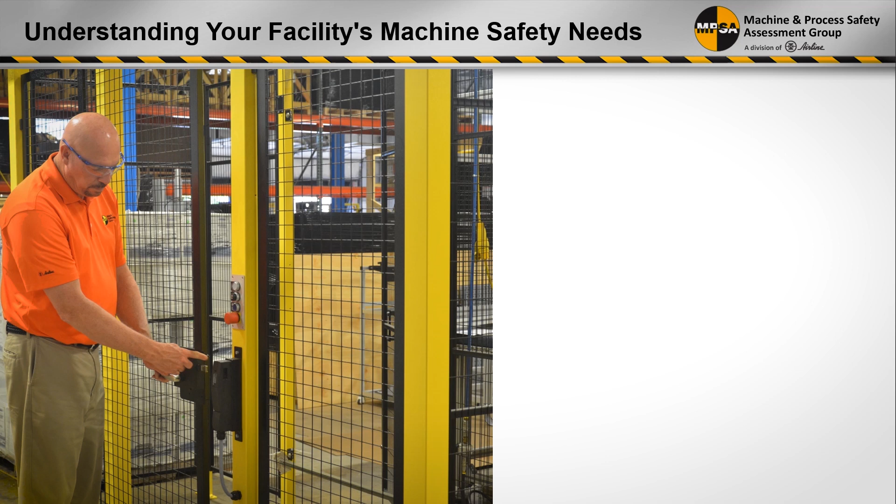Like all of the programs in our series, today's session will focus on machine safety topics that often begin as a question we encounter when working with our clients. Our goal is not to make you a machine safety expert, but to familiarize you with the technology, industry standards, and regulatory requirements that may apply. Most important is that you leave this session with an increased understanding of machine safety and know where you can find additional guidance when needed.

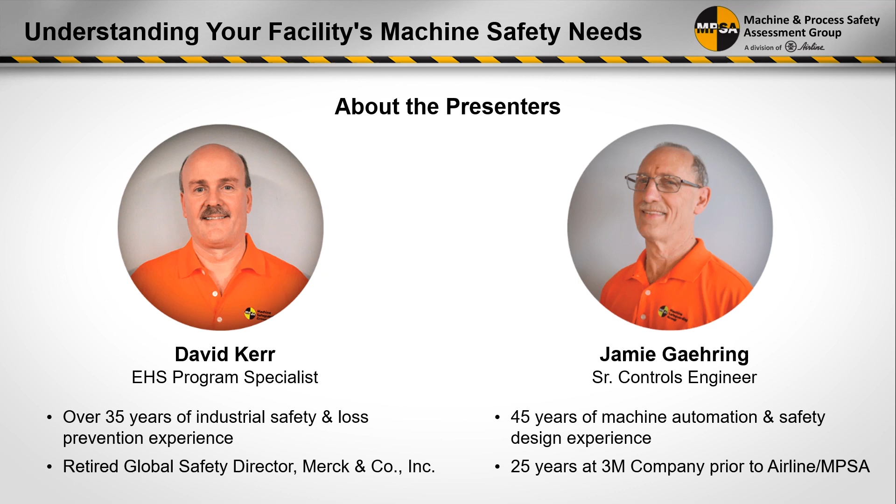David will begin today's session by discussing the challenges and complexity of machine safety.

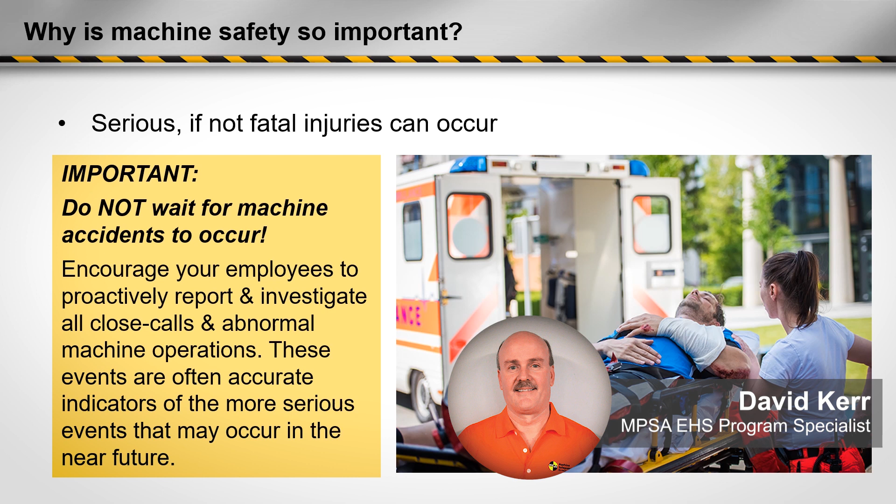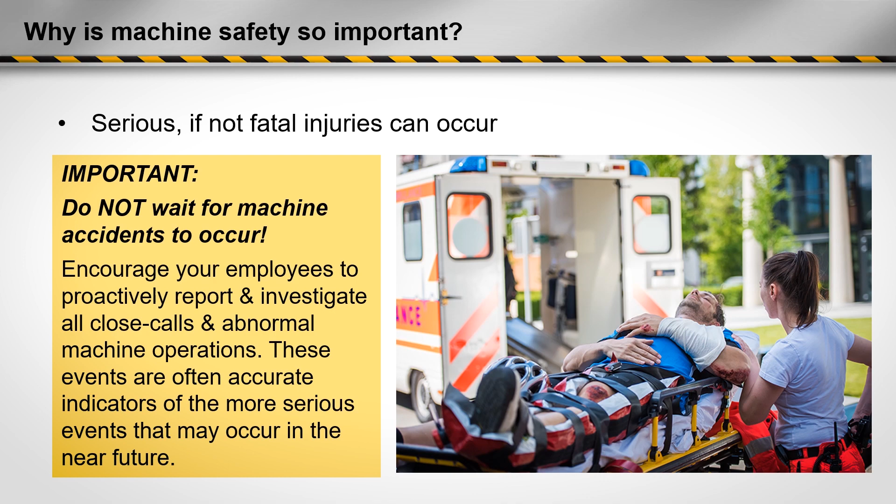Why is machine safety so important? First and foremost, machine safety incidents often result in serious, if not fatal injuries. These are not just soft tissue injuries, cuts, bruises, skin irritation. These are injuries that require emergency treatment, hospitalization, amputation, and unfortunately in some cases result in occupational fatalities. However, it is important not to wait for machine accidents to occur. Encourage your employees to proactively report and investigate all close calls and abnormal machine operations. These events are often accurate indicators of the more serious events that may occur in the near future.

Machine safety incidents can be very traumatic and have a lasting impact on employees, especially those who have firsthand witnessed such traumatic events. Machine safety incidents can also create doubt in the minds of employees who must continue to operate similar machinery.

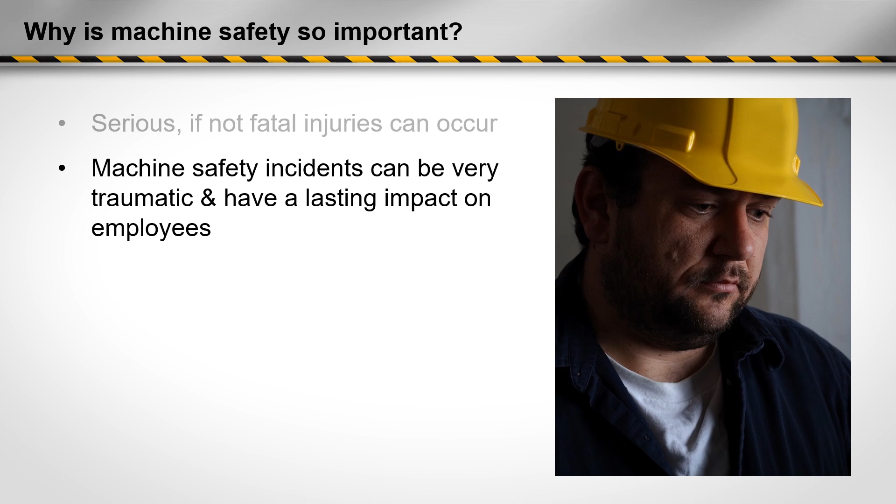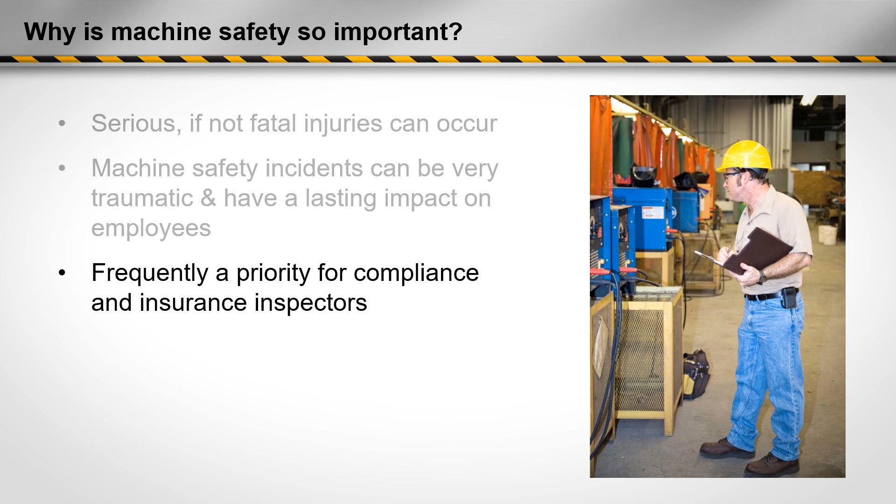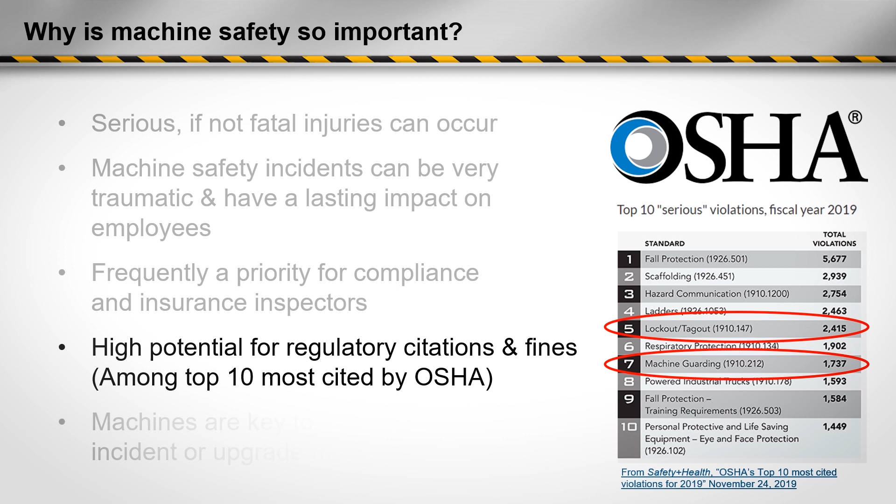Due to the seriousness of machine safety incidents, machine safety continues to be a priority for both compliance and insurance inspectors. Due to this increased emphasis, machine safety continues to have a high potential for regulatory citations and fines. As can be seen on the right-hand side of the slide, both machine guarding and lockout-tagout continue to be one of the top 10 most cited violations by OSHA. But we all know that machines are key to revenue generation, and any safety incident or upgrade may impact critical production needs.

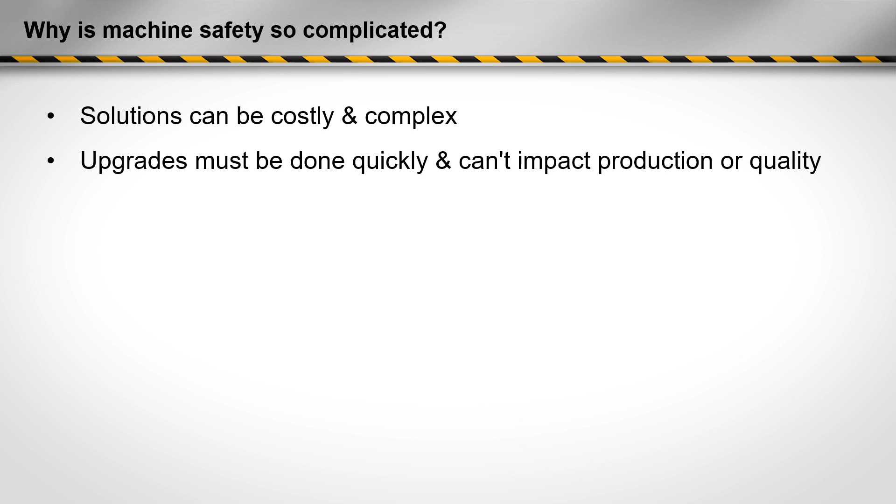Why is machine safety so complicated? Well, quite frankly, solutions can be costly and complex. Upgrades must be done quickly and often can't impact production or quality. Machine safety must address normal production operations as well as hazardous energy control during lockout-tagout conditions. Machine safety often requires the control of several hazardous energy sources, including electrical, hydraulic, pneumatic, mechanical, chemical, thermal, gravity, or stored energy.

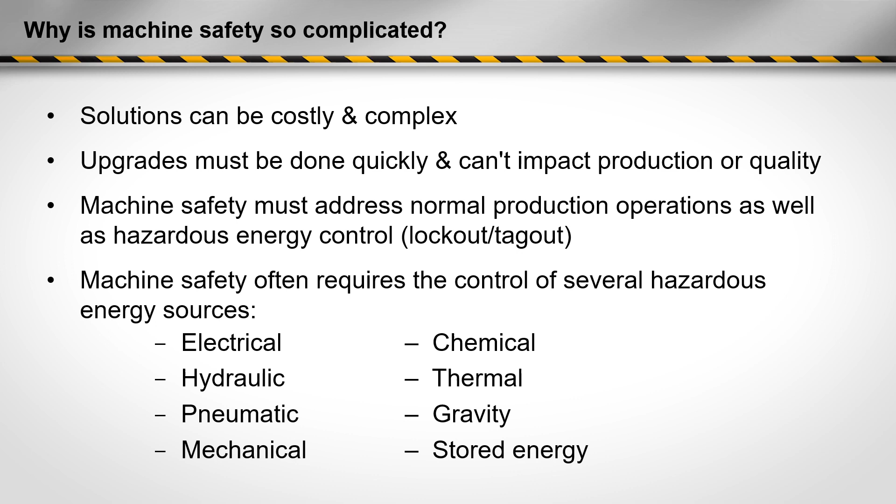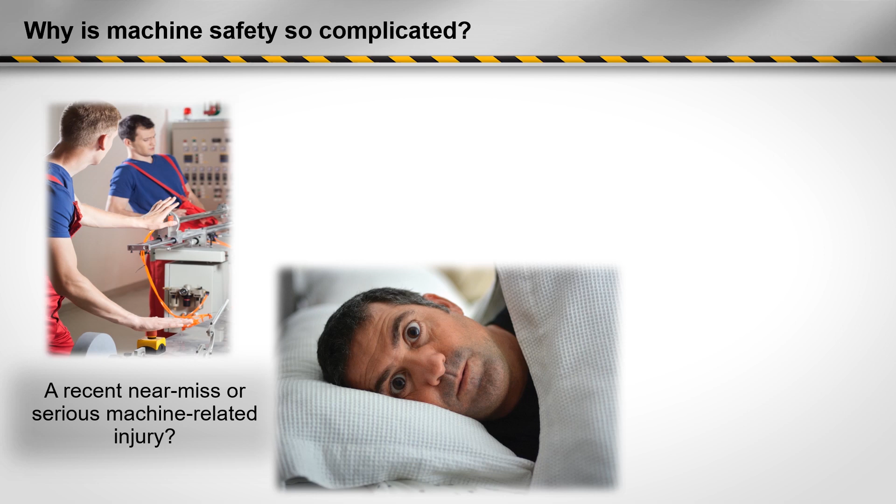Machine safety may also be complicated due to one of the following reasons: a recent near-miss or serious machine-related injury, the OSHA, ANSI, ISO, and NFPA safety standards are just too confusing, or a third-party risk assessment has identified several risks but provides no ideas on how to fix them.

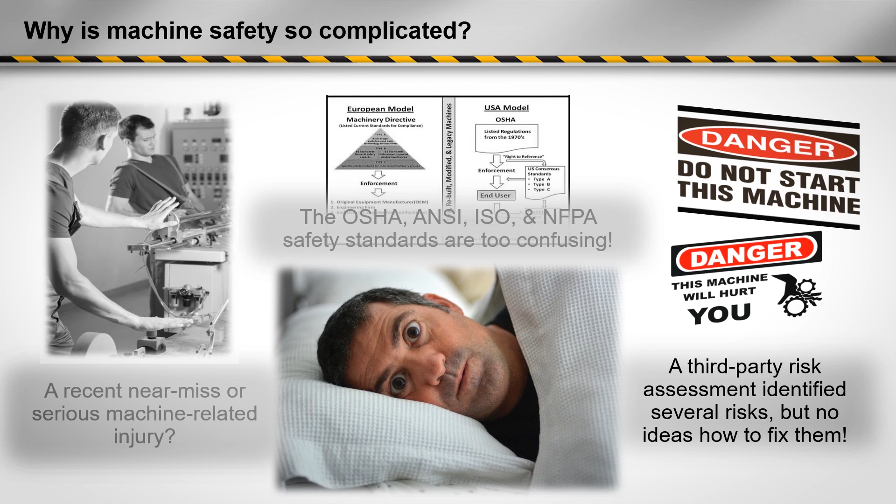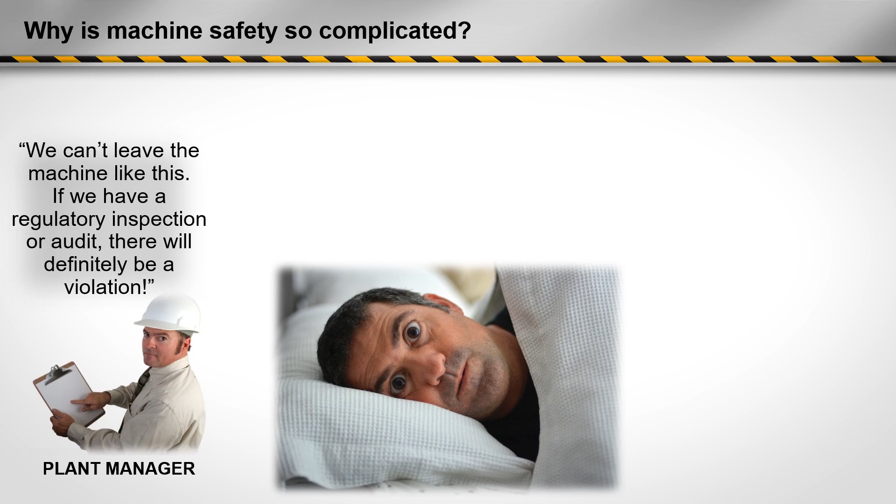Machine safety may be complicated by a variety of concerns by various stakeholders in your facility. Often these are valid yet difficult questions to answer. Plant management may be concerned over the potential for a future regulatory inspection or audit. Your procurement department may advise you that the original equipment manufacturer is unable to modify your existing unsafe machine. They say that it will need to be completely replaced. Your engineering manager may determine that the safety upgrades may cost more than the machine is worth.

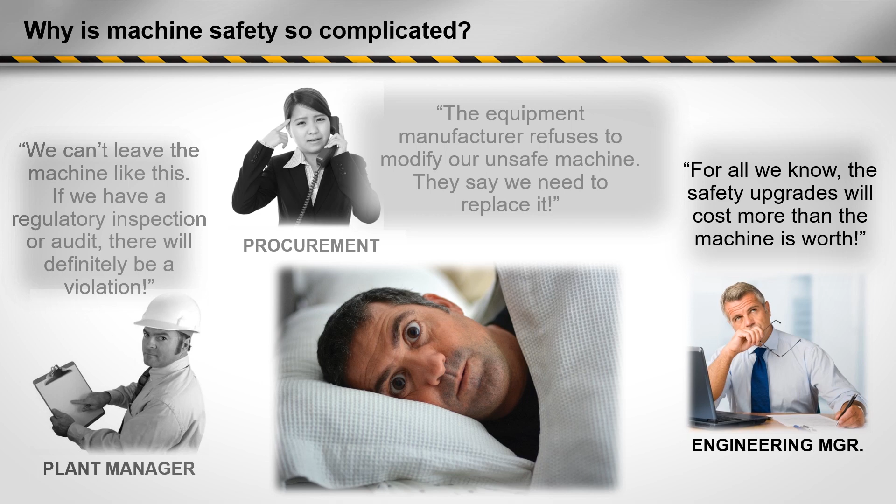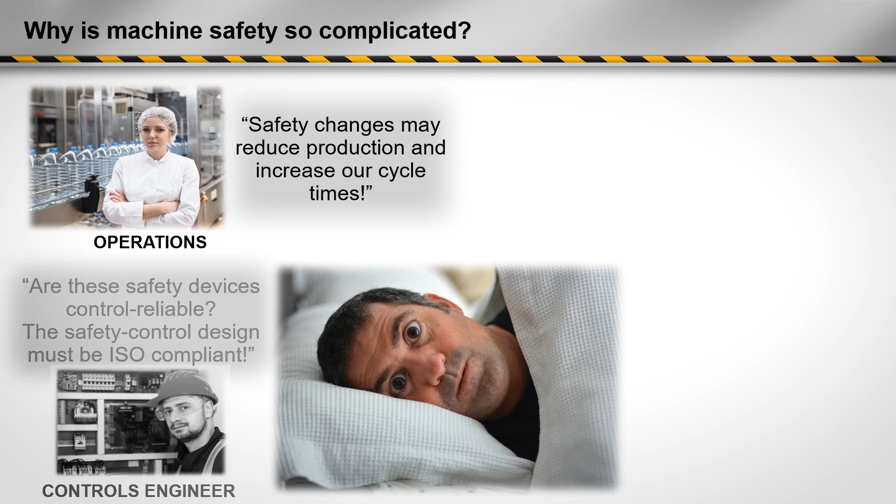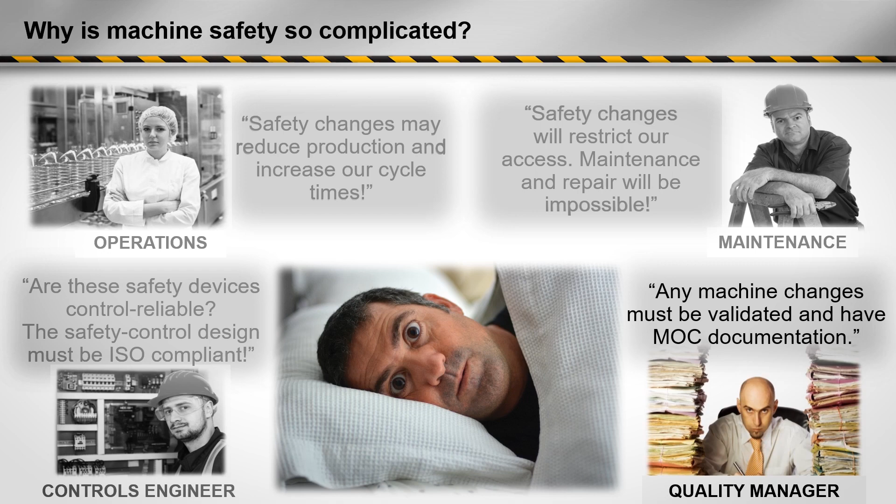Your control engineering group may be concerned about the control reliability of safety controls, ensuring that they're ISO compliant. Operations personnel may be concerned with reduced production and increased cycle times. Maintenance may be concerned about restricted access and may have concerns that maintenance and repair may become impossible. And the quality organization may be concerned with any equipment or processes that are validated or qualified and having appropriate management of change documentation to support any such changes.

As you can see, machinery safety can be very complicated for a variety of reasons and concerns expressed by a variety of stakeholders within your organization. Due to this complexity, we often refer to this as the machinery safety gray space. Despite this, as an employer, you are still obligated by law to provide safe and compliant machinery.

Let's now talk about some practical steps your organization can take for implementing a machine safety program. Let's continue discussing how to implement a machine safety program. Here are some key considerations.

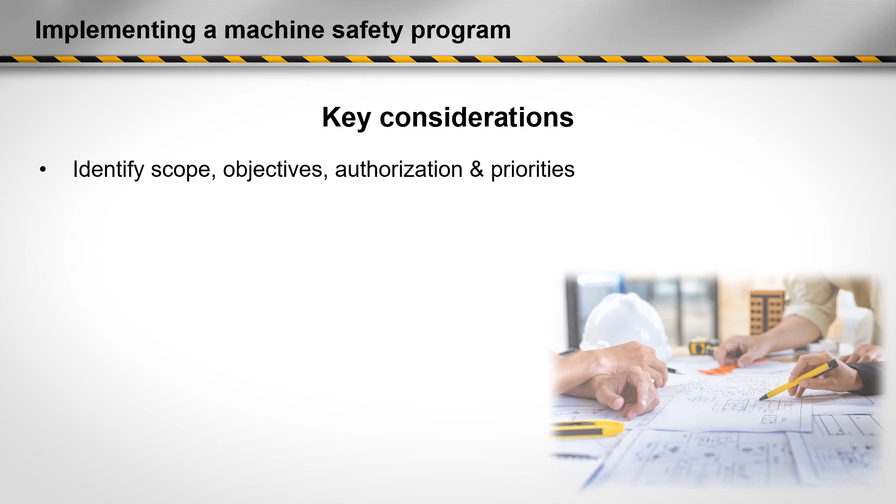Identify the scope, objectives, authorization, and priorities for your program. As with all programs or improvement initiatives, having a clearly identified scope, objectives, authorization, and priorities is critical for program success. Implement a machine safety advisory team with defined responsibilities and shared machine safety knowledge. Think of this as your gray space team. Having this diversity of expertise, knowledge, and input will only ensure a much more successful outcome.

Equipment inventory and machine documentation will be critical. Collection of this information will be necessary prior to conducting any risk assessments, designing or fabricating improvements, or any installation of safety solutions.

Select a hazard identification methodology. It may be necessary to reach out to regulators, your insurance company, or your company's health and safety organization to determine which methodology is most suitable for your operations. Feasibility review and financial guidelines are critical for the success of any program. Such guidelines are necessary to allow plant management and senior management to understand the cost-benefit analysis.

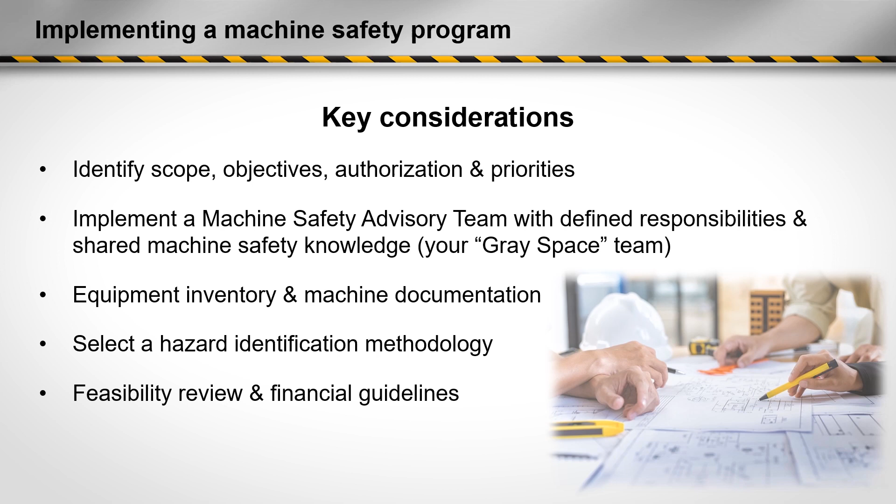When implementing a machine safety program, proven and successful programs have often followed a machine safety process similar to the graphic shown. These processes typically include 6 key elements as shown. First, the hazard identification, followed by the design and fabrication, then the installation and validation, and lastly, the training of both operators and maintenance personnel to maintain these devices.

When implementing a machine safety process, it is first critical to understand, does your organization have the internal resources needed, or must they partner with an external resource to assist with some or all of these key steps? Lastly is the management of change and mechanical integrity procedure. It will be critical to have such programs in place to track and maintain the safety upgrades made to your machines and to ensure that any future change is consistent with minimizing or reducing hazards for both a safe and compliant installation.

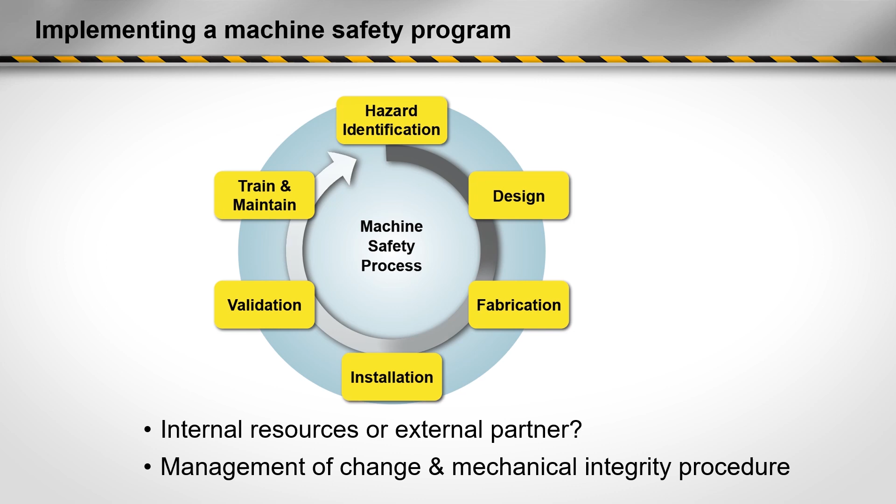So how do you get started? As noted on the prior slides, collaboration with stakeholders such as operations, maintenance, engineering, and EH&S is necessary to acknowledge everyone's concerns. Type of machinery. Often off-the-shelf guarding and simple control devices may be suitable for upgrading machine shop equipment. However, larger production, packaging, and material handling machinery may require a fully customized solution.

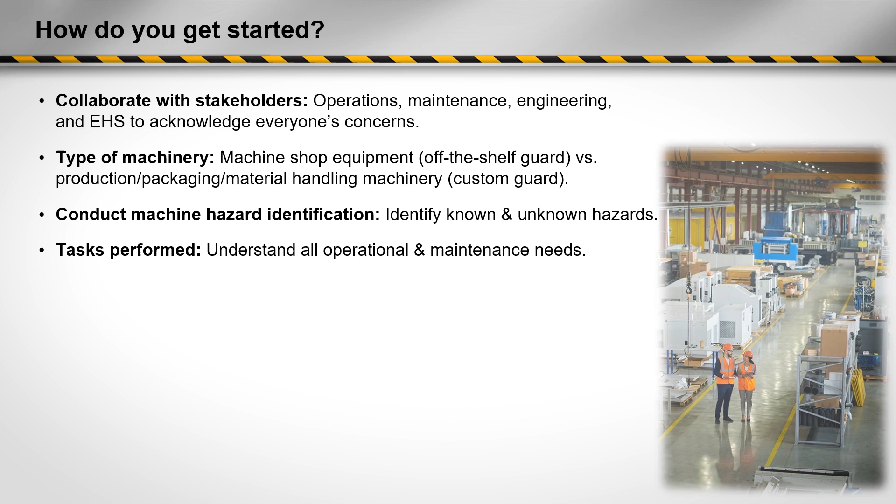Conduct the machine hazard identification to identify both the known and the unknown hazards. Understand all operational and maintenance needs. Identify lockout-tagout versus normal machine operation needs and solutions. Identify and control all forms of hazardous energy. Perform stop time analysis to determine adequacy and proximity of existing access control devices such as light curtains and scanners.

Based on the above findings, introduce solutions, whether guarding or safety control solutions, to reduce or eliminate the noted machine safety risk. Finally, ensure that all solutions are user-friendly and have no or minimal impact on production.

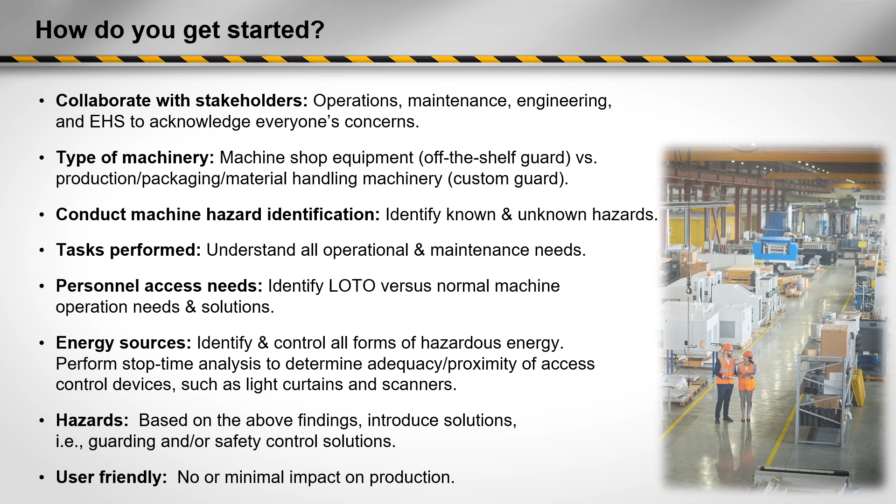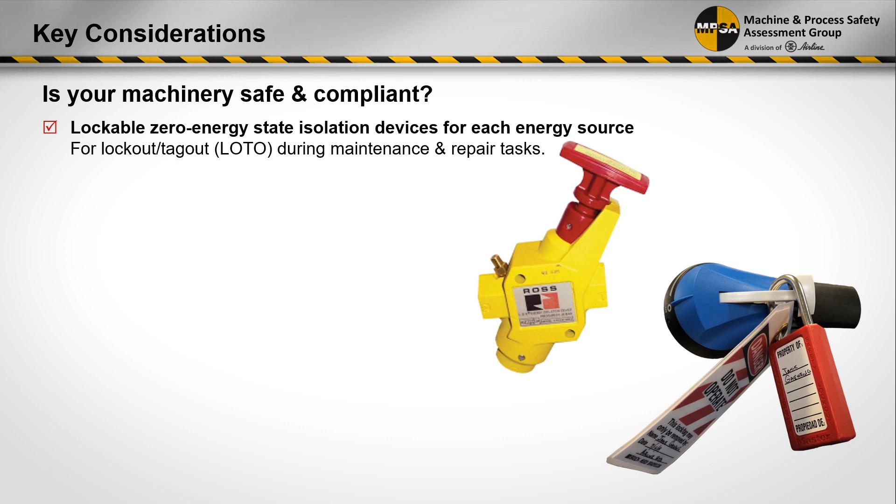Now we will talk about key considerations in recognizing safety devices on your machinery and if they have been properly applied. Lockable zero energy state isolation devices are used for lockout tagout. Some common lockout isolation devices are the electrical disconnect switch for isolating electrical energy, the item on the right, and the compressed air manual isolation device and dump valve on the left.

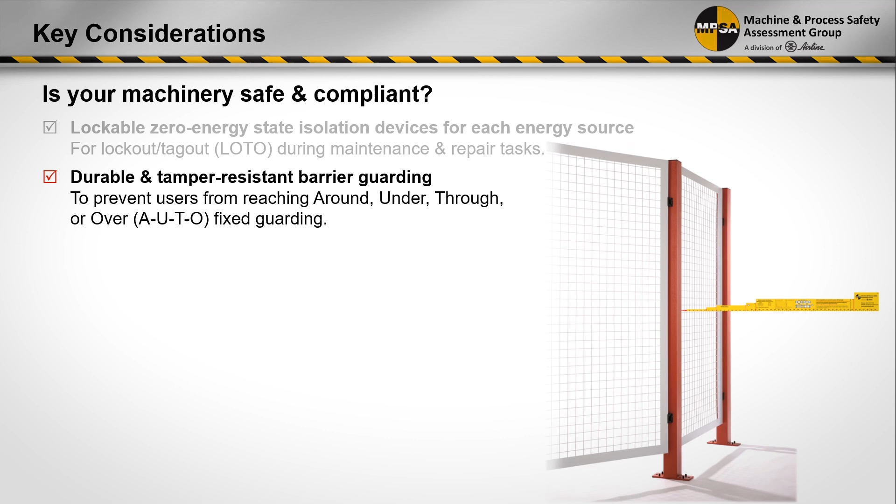Your barrier guarding needs to be durable and tamper resistant, and it needs to prevent operators from reaching around, under, through, or over your fixed guarding. In this case, this is a wire mesh guarding. This is also called separating guarding because it is a physical separation between the hazard and an operator. The tool shown on the right was developed from minimum safe distance charts found in the ISO 13857 standard. It confirms the minimum safe distance to the hazard based on the guard openings.

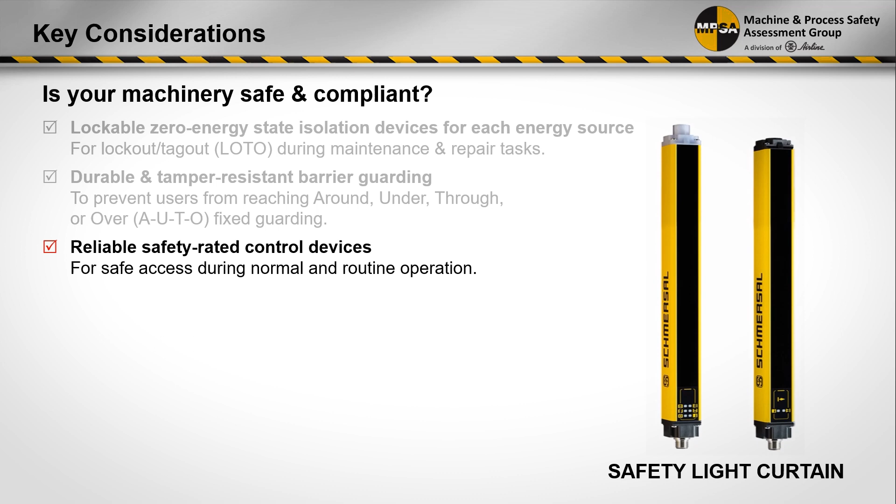Now we'll talk about reliable safety rated control devices, the first one being safety light curtains. A safety light curtain is a presence sensing device that can detect when a person is between the light curtains, as are safety laser scanners. Like separating guarding, a minimum safe distance calculation is required.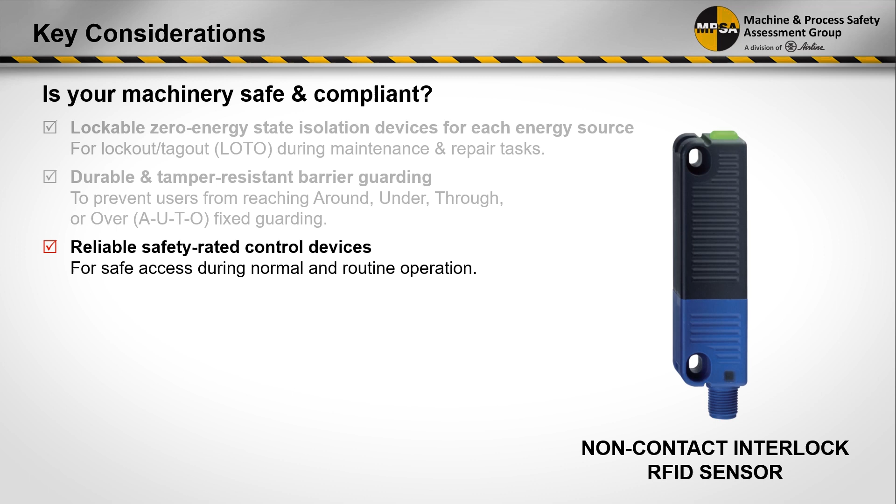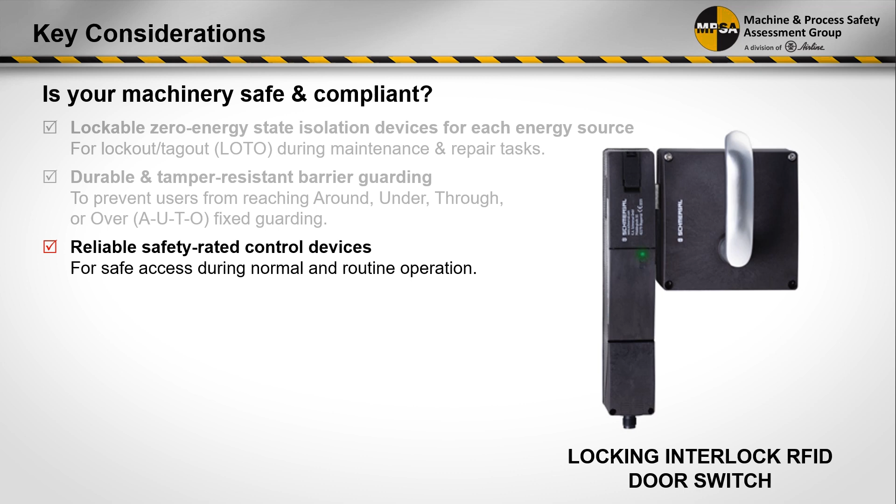Now, this interlock switch is very similar to the last one. It's also RFID, and it's a door switch. The difference here is that this is also used for movable separating guarding, meaning access doors and the like. It protects personnel from the hazard until the hazard has been removed. Most common use is where there's a long rundown time, let's say, of a motor-driven machine. And this prevents personnel from being able to access the hazard by keeping the door locked until that machine is in a complete standstill state.

Now, this is an emergency stop. I'm sure you've probably seen them in your plant. I hope that you have them in your plant. Emergency stops, though, are a secondary protection. Now, some of the standards listed here, for instance, ISO 13850 and IEC 60947-5-5, are standards for the principle of design of the hardware itself, the e-stops. All industrial machines require an emergency stop, as is found in IEC 60204-1 and NFPA 79.

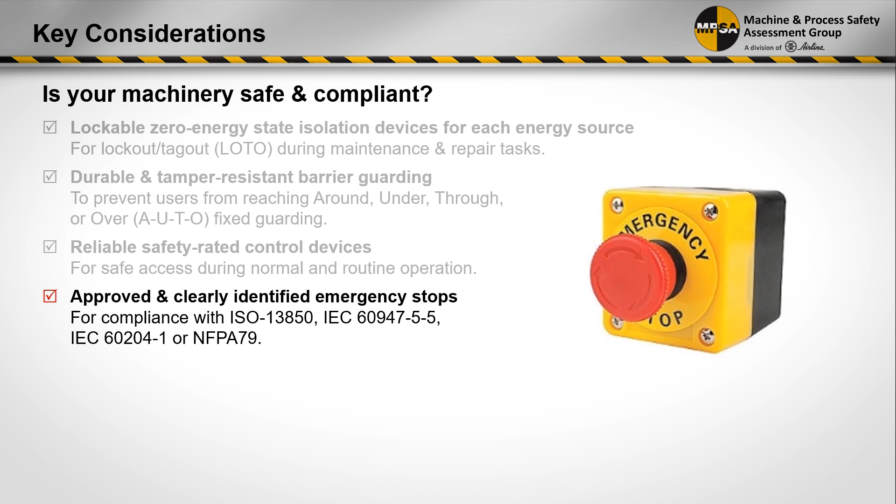One of the last things to look at is your testing and confirmation of machine stop times if you're using safety light curtains or laser scanners. The formula shown in this slide is actually an ANSI formula for minimum safe distance found in ANSI B11.19. The equivalent international standard is ISO 13855, and it has a very similar formula.

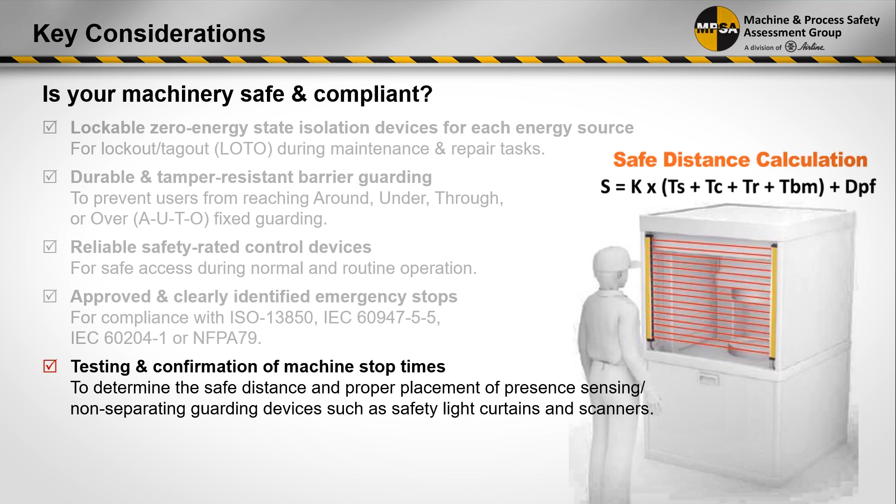These formulas had to be calculated to know that the light curtain or scanner is positioned in such a way that the operator cannot reach the hazard before the hazards come to a complete stop or standstill state. And the last part of the process of designing a safety system is validation, testing, and maintenance. Validation is a necessary part of implementing a machine safety system.

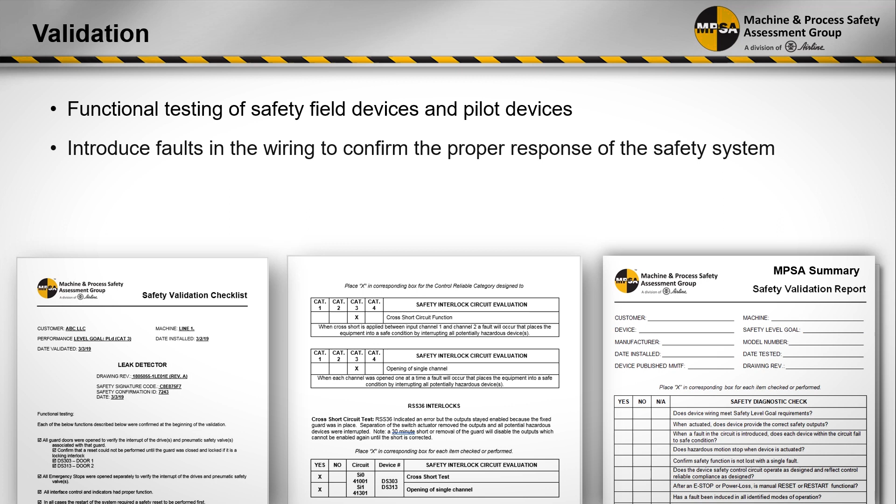Validation itself is a functional testing of the safety field devices and the pilot devices. And during that validation, you introduce faults into the wiring to confirm the proper response of the safety system. You force faults into the monitoring circuits, things like the external device monitoring contactors, the EDMs.

Now, a safety control engineer will develop a validation plan to perform the validation of the safety system. It confirms that the installed system has been properly designed and installed to satisfy the performance level and category architecture defined during the risk assessment. Everything goes back to the risk assessment. This validation must be performed prior to releasing the machine to production.

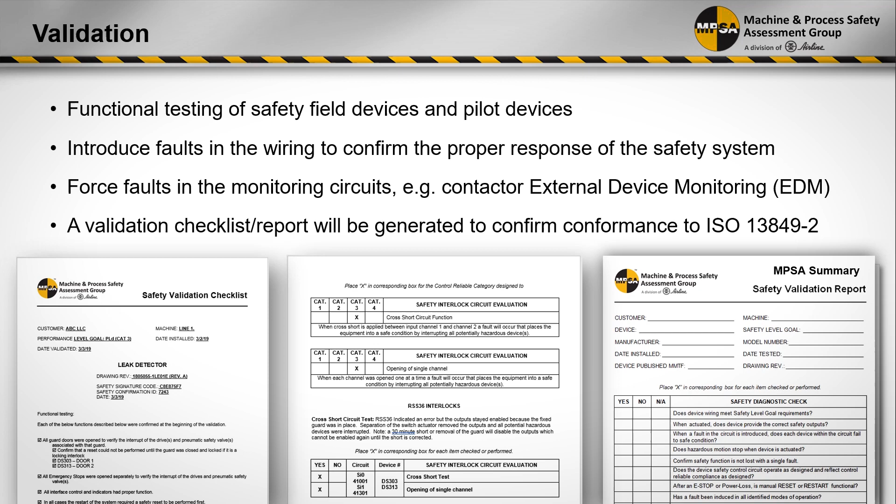The documents down at the bottom of the slide are examples of validation checklists and validation summary reports. And these should be generated to confirm conformance to ISO 13849-2.

Thank you, Jamie, for sharing your expertise. It looks like we have some questions from our viewers. So here's the first one. What is the best way to educate my staff to have the skill level to confirm that our machine builders and in-house maintenance people are using the right components to give us an OSHA compliant solution? That sounds like a question for you, Dave, since it deals with EHS issues.

Yes, Marie, and that's actually an excellent question. Actually, attending programs much like this and other programs offered by safety equipment or safety component manufacturers and turnkey machine vendors or safety machine vendors is really your first step. Some of those programs are offered for free, and other of those programs, there may be a fee associated with them.

Also, to ensure that your machine builder has expertise in machine safety, you might want to establish and share some of your internal machine safety standards and include those in your contractual agreements as references to reflect either the regulatory or the consensus standards that you want your machine builder to observe.

There's also a few training and certification programs available specifically for machine safety control engineers or in-plant maintenance personnel. And these types of programs really may be appropriate for folks who have those responsibilities in your plant, whether it be your instrumentation group, the automation, or the control engineering group. And these programs typically last 3 to 5 days, and there's a certification available after passing the examination.